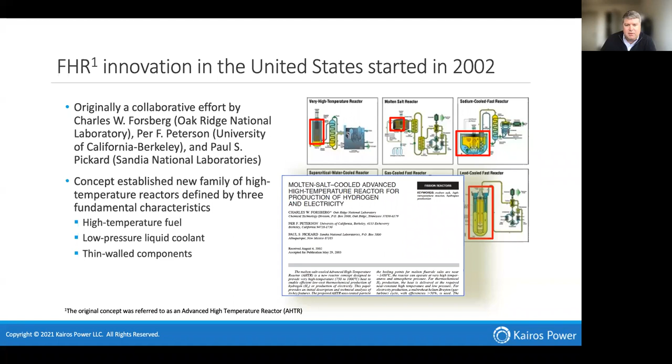This was a paper that was pretty much what kickstarted a lot of the US development around FHRs. At the time, they were called AHTRs. Really, it's a combination of these different technologies. So the root of FHRs started in the early 2000s, originally through Oak Ridge, but then really pushed through a number of different university and subsequent Oak Ridge programs funded by DOE.

Like many things, there's a lot of research being done both at the national labs and at the universities. This is a bit of a historical walkthrough of the origins of FHR, starting from that early 2000 time period. There was a lot of work to reinvigorate flibe work, and a lot of that was actually done at the University of Wisconsin-Madison. They had a lot of experience working with flibe predominantly through the fusion program, and this reinterest in looking at fluoride salt coolants for different types of fission applications was really kickstarted at UW.

There was a lot of work done through the universities. Some of this was funded through the Department of Energy IRP programs. So the initial IRP that started to look into this technology was a combination of MIT, Berkeley, and Madison in terms of developing some of the early concepts. There was some interest from the Chinese Academy of Science, where they were looking at a liquid fueled reactor, which has some overlap with some of the technology development needs for the FHR. And so there was a CRADA put in place between Oak Ridge and the Chinese Academy of Sciences, and there was a lot of active research going on.

Around the time of 2015, 2016, there was a recognition that a lot of this was active research. It was good research. It was pushing certain elements of the technology forward, at a lot of good universities and national labs. There's a big interest in doing paper reactor design or PowerPoint reactor design. So a lot of conceptual designs were being pushed both at the university level as well as through national labs. Around this 2015, 2016 time period, there was just a recognition that while this work was great, it wasn't going to lead to a commercialized technology.

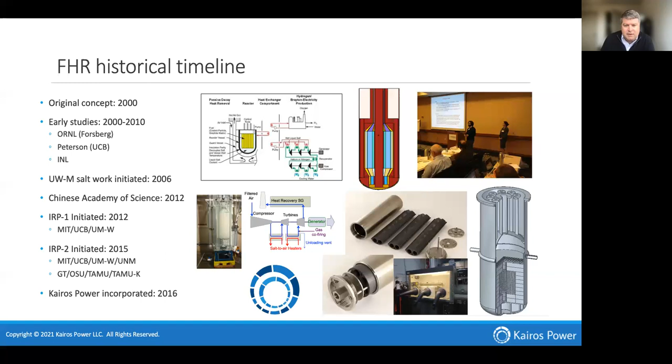In order for it to be successful, it would actually have to leave the university and national lab arena where it was predominantly being developed and pushed, and go into the private sector. That led to the inception of Kairos Power, which was incorporated in 2016, really at the end of the year. And I'll talk a little bit about the history of Kairos moving forward.

So we're a mission-driven company, as I mentioned, and we're singularly focused on the commercialization of one technology. We're not looking at lots of different types of applications of our technology. We're really focused on commercial deployment of the FHR. And we believe very strongly that there are opportunities in the United States for deployment. As I mentioned, we were founded in 2016.

We have about 210 employees across different sites, and I'll talk about those sites shortly. We're heavily engineering focused, so about 90% of our staff is engineering, and I think that number still holds true where we currently stand. We have private funding committed to our engineering design and licensing programs, as well as physical demonstration through both our nuclear and our non-nuclear technology development program.

We believe, like a number of our competitors, for us to be competitive, we have to focus on natural gas, not on nuclear that is unfortunately going out and being decommissioned. And so we believe very strongly that we have to be competitive with all sources of generation that utilities are considering across the United States.

In terms of locations, our headquarters is located in Alameda. We acquired an old naval hangar out on Alameda base, the naval base. If you're familiar with the Mythbusters show, it's a site where a lot of funny things happen. It's a neat space, and we moved in there in about 2017. We also have a location in Albuquerque, New Mexico, which we call KP Southwest. It's where we house what we call our engineering test unit, as well as our larger scale qualification testing.

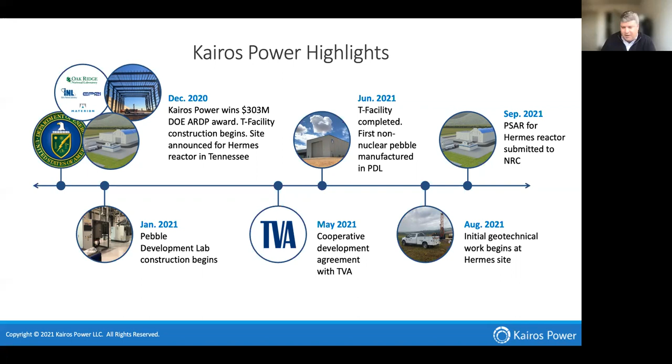And then last but not least, we're very pleased to announce that we submitted our PSAR for the Hermes reactor. It's a preliminary safety analysis report that was submitted just last month. So we've been very busy. Lots has been happening at Kairos, and these are just some of the highlights associated with it.

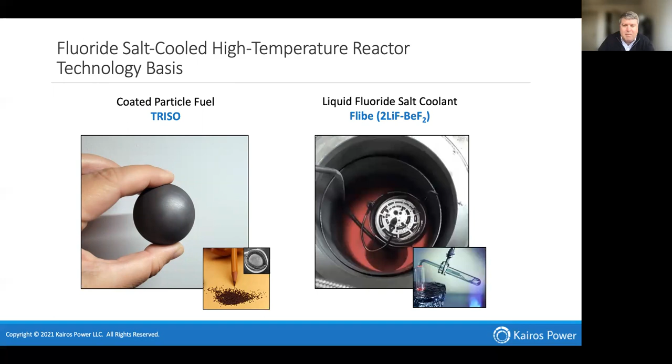So as I mentioned, really a combination of the high temperature gas reactor technology and the MSR technology. This is a Kairos Pebble on the left-hand side. For many people who may be more familiar with the gas reactor program and Pebble fuel historically, think of Kairos as being golf balls, and think about sort of HTGR and PBMR Pebble sizes as billiard balls.

So we're smaller diameter. On the lower left is tristructural-isotropic particles. That's actually a pressed pebble that Kairos has made on the left-hand side. And then we also utilize a high temperature fluoride salt coolant, Flibe.

If you can see, I think on the lower right is sort of the historical picture of Flibe that you see when you bring it up on Wikipedia. And this is just a picture of our first Flibe melt in our Salt Lab, showing the Flibe. It's a transparent coolant, an excellent coolant for us to be able to work with. And there's a number of reasons why we've down-selected to Flibe, and I'll talk a little bit about some of those shortly.

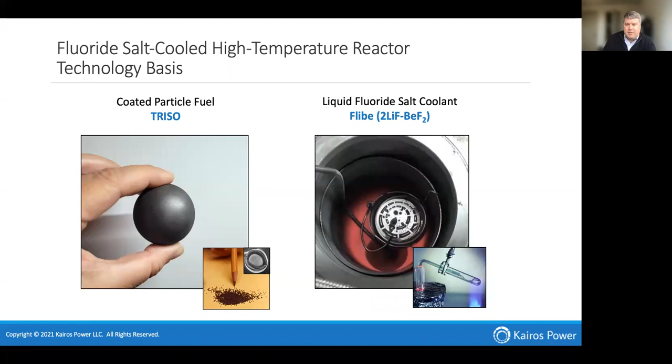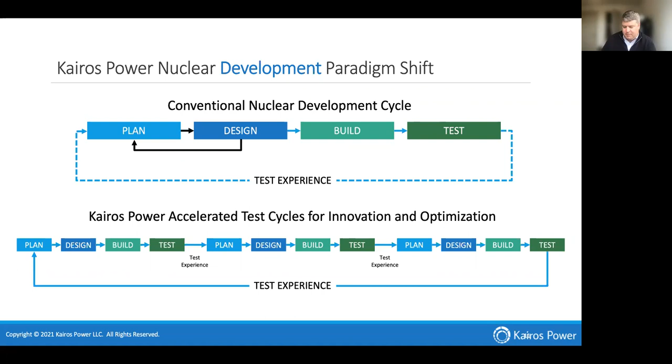This is key to everything that we do. It's key to our development, key to our licensing strategy, key to our commercial engagement. Breaking down problems that notoriously have very long time cycles into shorter time cycles is key to what we believe will be our commercial success strategy.

In order to do this, you have to have the capabilities and know-how to implement small loops quickly. So, as I mentioned, we have our Rapid Lab and our Salt Lab located at our headquarters in Alameda. We stood up our component testing facility in Albuquerque, where we're able to work with metric tonnage scale of FLIBE. And last but not least, we have what we're calling our U facility.

The U facility, I'll talk about a little later. This is a full-scale prototype of the commercial plant—not of what Hermes is, but the actual commercial plant and its nuclear island. It doesn't exist yet. We have some sites we're considering for it, but right now the focus is really on the upper three facilities I mentioned earlier.

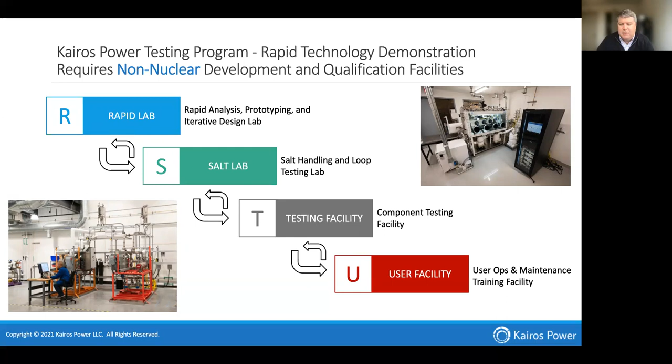But we believe this will be important for commercial users to get acquainted with the technology—how to operate the physical hardware, how to do remote inspections, how to do replacements, all the practical things that go into running a nuclear power plant. We believe the user facility, in addition to simulator work and other virtual tools, can be utilized to give a customer the confidence to operate the technology.

So as I mentioned, we're big on iterative development. We believe hardware is worth 1,000 calculations, so we're very focused on delivering hardware. On the lower right, it shows some of these loops that I was mentioning earlier. I'll talk a bit more about them in detail.

If you look at the lower right picture, we started off with a very small integrated demonstration—a water-based test—which leads into what we're calling our engineering test unit. This is actually a pretty substantial non-nuclear mechanical demonstration of our Hermes plant, of similar comparable scale. It has about 12.5 metric tons of FLIBE, making it the largest FLIBE test ever done. This is currently an activity going on in Albuquerque, and I'll show some pictures in a second.

The next iteration goes from a non-nuclear iteration to what we call our Hermes reactor, which will be in East Tennessee. Then it goes into another non-nuclear demonstration, our U facility, all the way out to what we call our KPX, or commercial plant. So it's both iterating at scale and iterating between non-nuclear and nuclear. We believe we're able to move faster in a non-nuclear environment to do major de-risking with these high temperature salt systems, and we want to leverage the ability to move quickly where possible.

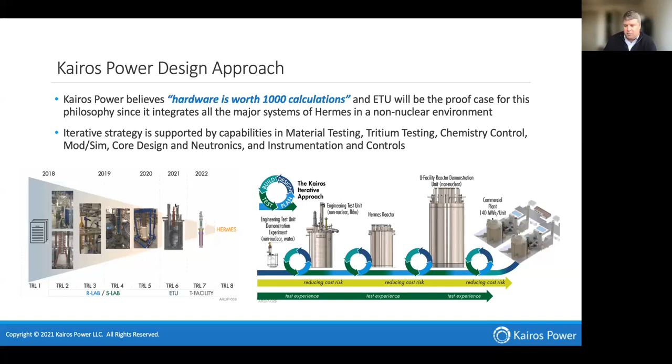So I'm going to talk a little about what we call little loops. As I mentioned, those four big steps I talked about earlier are what we might call large loops. But in order to get to the large loops, you actually have to do iterative smaller loops. I'll walk through a couple quick examples of how we in practice implement this iterative development, both in Alameda and in Albuquerque. So primary salt pumps is a good example.

The technology is not off the shelf. It's not readily available for FLIBE applications. There's been a lot of work, and a partnership actually with Barber-Nichols, to be able to develop this pump. But there were a lot of key questions along the way. And so, while we're very hardware focused, I want to assure you that we are...

Fervent believers in the value of modeling and simulation where it makes sense. Some of the loops I'm going to talk about are kind of in the context of where doing test demonstrations have been able to help either complement or even replace simulation work where needed. And so...

There was a lot of design work that went into what we call our primary salt pump, our PSP, and a lot of predictions about both pump curve and vibration. How do you manage thermal management? So how do you go from a 650-degree salt environment all the way up to 110 degrees, for example, in containment, to be able to manage those thermal gradients? And so we have to have the appropriate ability to manage that thermal gradient, and that becomes a real engineering challenge.

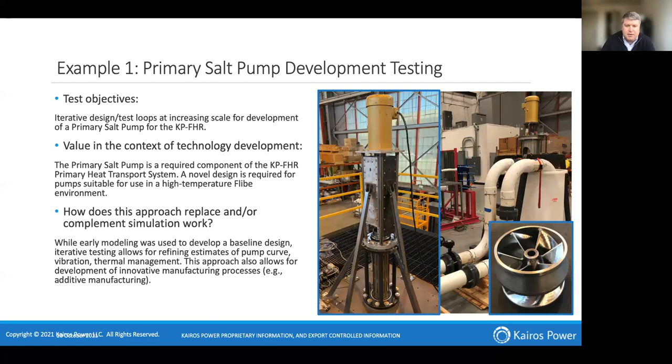So the impeller on the lower right, that's an additively manufactured impeller. We'll be utilizing that impeller in our engineering test unit. There was a lot of work done looking at the quality around the build, ensuring that the integrity of the build was appropriate for the application. But this is an example where we're able to incorporate different elements of both manufacturing and testing to be able to improve and optimize the design before it ultimately gets demonstrated in the engineering test unit.

In addition, control element drives. This is a unique technology. It's a technology, again, that's not off the shelf. No one has ever built an FHR. And so there are challenges about taking what might work for an SFR or what might work for an HTGR and what really needs to be done for this type of environment.

And so there were some key questions, similar challenges, because these are all components that sit on the upper head of the reactor vessel, where elements of conventional drive mechanisms really didn't apply to our environment. And so we've done a number of development tests, really testing out some of these mechanisms, ensuring that their fit and function perform well in this high temperature salt environment.

We've also been able to look into opportunities around more conventional manufacturing to be able to improve the design for manufacturability of these different components and then demonstrate them. And so in all of these different applications I'm walking through, there was a baseline simulation effort to kind of inform the performance of these types of components. But it's really bringing it into the lab, developing the hardware, and demonstrating that it ultimately works that gives us that greater confidence.

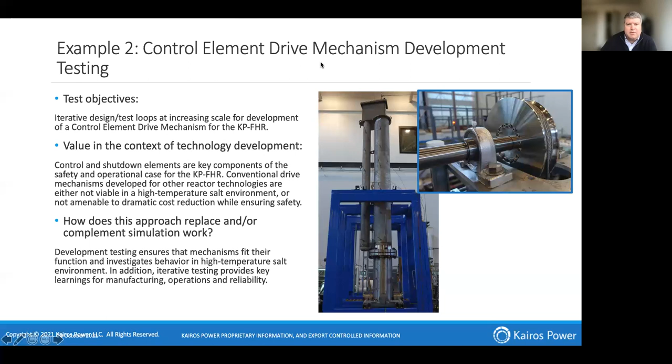Not everything we do is just around development. We also have validation testing needs. And so one of the key questions in the downcomer region for our vessel, it's a high impact phenomena for our reactor safety case, especially as we're looking at in-vessel natural circulation, if we're looking at a range of different transients such as loss of forced cooling transients. One of the unique features of the salts at 650 degrees C, there was a lot of work historically done...

Showing that you can actually use simulant fluids to preserve some of the key non-dimensional parameters. Ones that are important here are around mixed convection, but the ability to use lower temperature surrogates to get high quality validation data is really unique. The ability to get high quality validation data in a salt environment, just like the ability to get high quality validation data in an LWR environment, is really challenging. And the ability to preserve similitude for a single phase coolant and the ability to get good quality validation data allows us to build confidence in our tools.

And so we were able to do this test. It's actually extremely tall, I'm not sure the picture does it justice. It's about 12 to 15 feet tall.

Shows some nice tests we've done using Dowtherm to validate CFD simulations of the downcomer region. One of our strategies around IET and SET is the ability to leverage these simulants to build up a predictive accuracy capability with our evaluation models used for licensing. This is key, central to our development, and a really important aspect of our safety case.

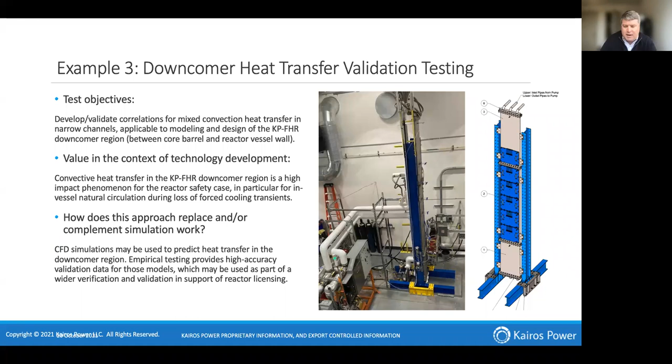It's here in Alameda, and it's a nice test that gives us the ability to look into some of the key performance features of our engineering test unit. We're able to look at both some of the mechanical features as well as fill and drain operations. It's a practical tool for operators, for ETU, to get some runtime with the physical demonstration.

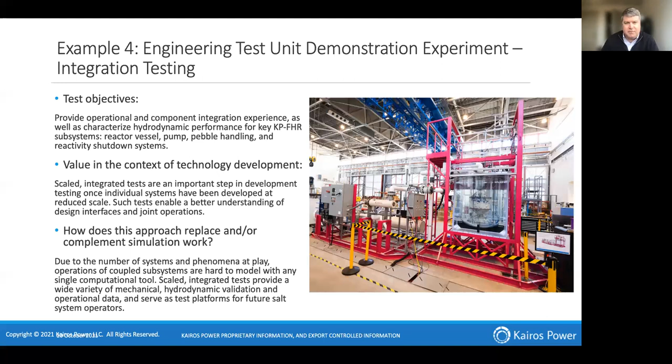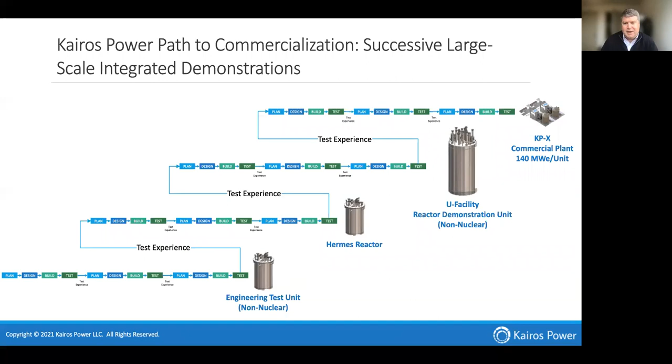These little loops lead to big loop integrated demonstrations. This is just a re-showing of those loops, showing the engineering test unit going to the Hermes reactor and our U facility, ultimately leading to the KPX. This shows this progression in a little bit more of a coherent snake chart: non-nuclear to nuclear to non-nuclear to nuclear.

Switching gears here, talking about larger scale demonstrations. This is the engineering test unit as compared to our first commercial unit, the KPX. What is our engineering test unit? It's non-nuclear, unenriched, flibe-wetted, and isothermal. It effectively uses all of the same mechanical features that you'd see in our Hermes technology, but it's obviously non-nuclear. So it's a full-scale version of Hermes, and it's proportional to the KPX demonstration.

Why? We're very interested in ensuring competitive cost through vertical integration. This is a very important aspect of the Kairos development. We also want to flex our supply chain early in the development, and that's really key. In addition, it allows us to demonstrate our design and test elements of our program, and the ability to iterate more quickly through these developments. The ETU is really a culmination of a number of those smaller, earlier loops, and it also allows us to accelerate the base of our large-scale FLIBE operations.

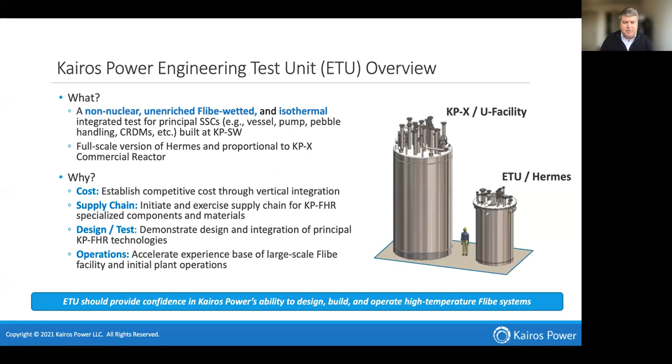As I mentioned, this is 12.5 metric tons of FLIBE, and this is the first time anyone has done a test of this scale. So it allows us to build that operational case and that ability.

Just some pictures for scale. This is actually half of the ETU vessel, a slightly older picture showing the vessel on its side. The support plate or support structure is in the lower right, but this is about half the height. ETU is the exact same technology as Hermes, but for scale, it gives you an idea of what the Hermes vessel would look like. That's half the size of the vessel since it's on its side, and they're actually welding the upper part of the shell here shortly.

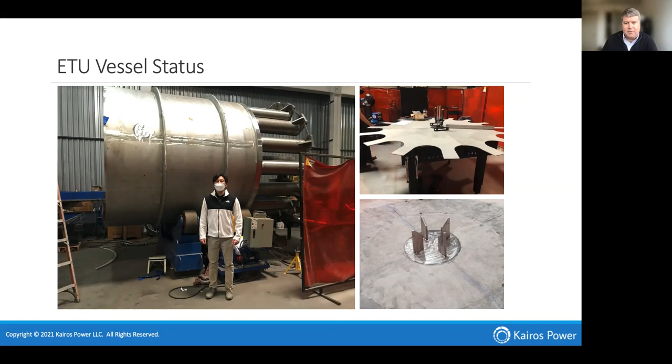We believe strongly in standing up manufacturing capabilities where existing suppliers do not exist. So we've invested a fair amount of time and effort into graphite block manufacturing at KP Southwest. These are some non-proprietary pictures of both the capability as well as some of the blocks, and where they start before they actually go into becoming part of the reflector structure within the ETU.

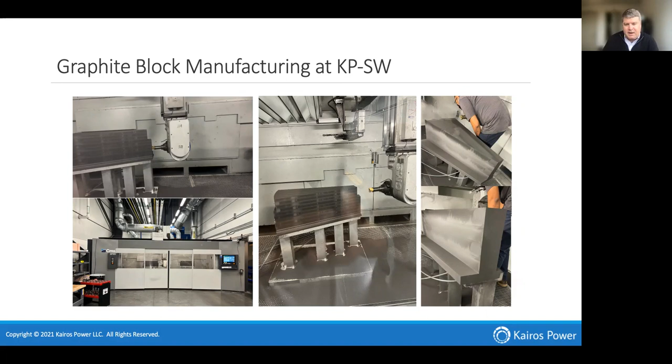Let's see if this video works. It shows, for those who have seen graphite machining before, it's a very messy process. If you look at the picture in the lower left, a lot of the HVAC supply you see on the upper part of the mill is really a dust collector system that's capable of removing dust in situ while you're doing the machining. This is a unique capability Kairos is investing in, and it's really part of our DNA in terms of bringing manufacturing in-house.

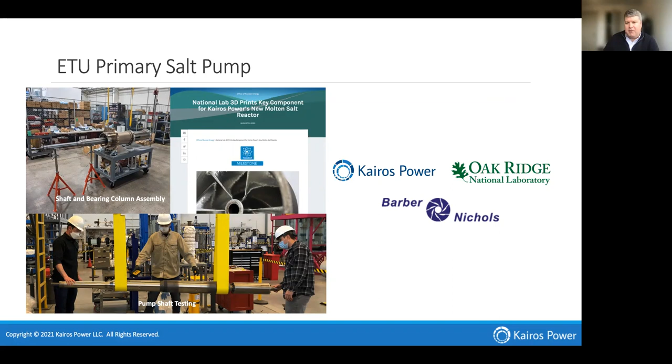Just some more snapshots showing the primary salt pump. This shows the shaft and bearing column assembly, as well as some of the pump shaft tests that were being done. Our partners, we worked extensively with both Oak Ridge and Barber-Nichols.

Here's some other pictures of the primary heat transport system, showing some of the piping systems. These are 8-inch diameter stainless steel pipes, quite large pipe, by which the fluoride salt flibe is circulating through for the engineering test unit.

Our piping system is designed to meet B31.3, so we've got skilled welders here on site doing a fair amount of the welding to assemble the PHTS. The final assembly is shown in the lower middle picture, showing the PHTS system in pieces and parts. At the top of that bottom middle picture, you see where the vessel is to be housed, showing approximately what the geometry of that piping looks like when laid out.

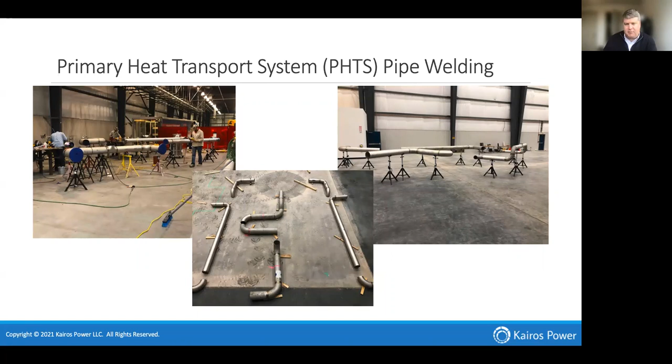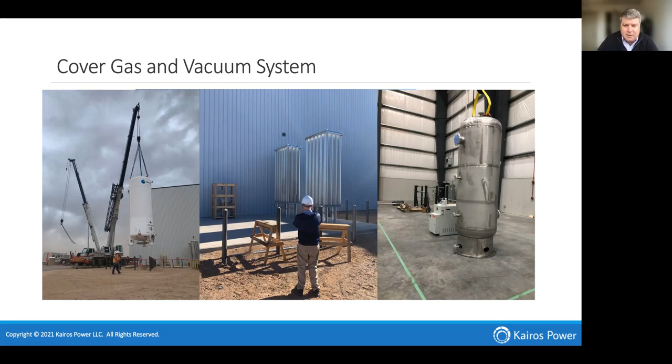One of the neat things, and I'll talk a bit later about this, is we found great success in hiring recent grads. You need a combination of experience as well as a lot of enthusiastic, mechanically inclined recent grads, and there's a ton of opportunities. A lot of the activities I just showed, a number of them were led by or driven by recent grads, being put into a high-paced environment to take ideation, simple ideas starting with early development, and really run them through the paces to get into larger scale demonstrations. So we have a fair amount of experience on staff, but also a large number of recent grads, including a number who come to us from the University of Tennessee.

It's important that we maintain a quality EH&S program. Working with FLIBE is serious business. Working with the beryllium bearing salt presents its own unique hazards and challenges. We've done a great job so far working with FLIBE. We're limited in the quantities we can work with here in Alameda, and we're going to a larger scale at the engineering test unit, where we're working at metric ton scale, so our EH&S program has to scale appropriately.

Our EH&S program is a big part of what we're doing right now. It's how we ensure we can work responsibly with salt, and we're very excited about the record we have. We've spent a lot of time partnering with the Materion company, located in Ohio, as part of our strategic partnership. They've been central in translating strong lessons learned from their operations working with both beryllium fluoride and beryllium in general, and they've been an excellent partner.

And so these are just some examples of the type of PPE and some of the training activities that we do out here in Alameda.

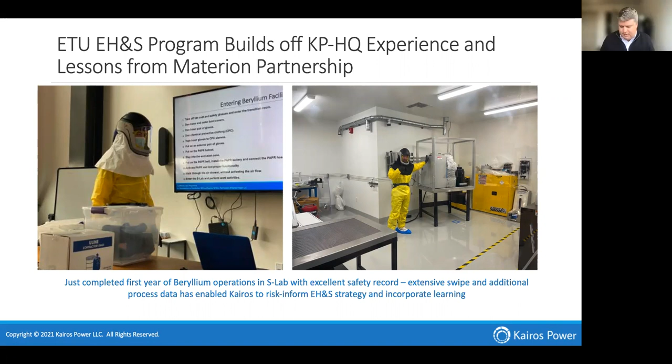And I believe last but not least, this just shows the control room, as well as our operations support room in Alameda. We've spent a lot of time incorporating lessons learned from historical operations, both from the nuclear side and from our site director at KP Southwest, who comes to us from SpaceX with a lot of experience in control rooms for shuttle launches as well as space launch. So that combination of non-nuclear and nuclear operational background, bringing that into a new environment operating a large-scale FLIBE system, we believe has given us a great opportunity to bring a lot of best practices from different industries as well as what is needed for a non-power test reactor.

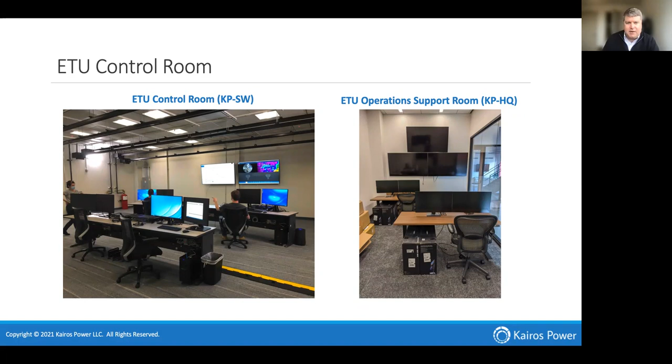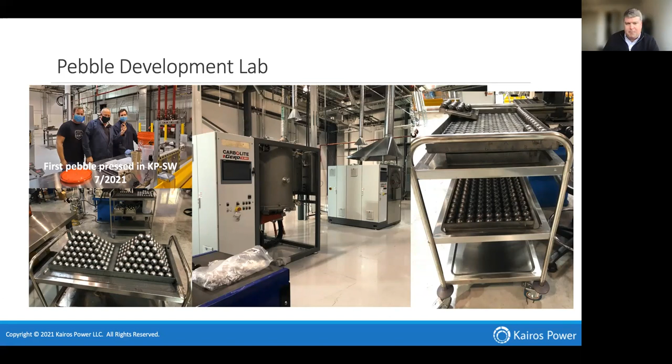Last but not least, this is a picture of our Pebble development lab. We need 30 to 35,000 pebbles for the engineering test unit. We are pressing all of those pebbles at KP Southwest in our Albuquerque site. We pressed our first pebble in July, and we're about 15% of the way through, moving very quickly through pebble pressing. This just shows a couple pictures of those formed pebbles.

I'm going to transition here, actually do a little bit of a time check. It seems like I've got about 5 minutes left, and then we can hopefully open it up to a broader discussion. The Hermes low power demonstration reactor.

What is the low power demonstration reactor? Well, it's a reactor that we hope will prove Kairos's ability to deliver low cost nuclear heat. Some of the overarching objectives of Hermes actually build off of the engineering test unit. So we want to be able to establish a competitive cost, and we have a very aggressive overnight capital cost target for Hermes.

We believe that's important. Our supply chain, we believe it's critical. So our supply chain for engineering test unit is predominantly focused on non-nuclear today. Hermes is obviously a nuclear facility, a nuclear reactor, and it's going to have those types of specialized components. So this is a key part of why we're standing up Hermes, again to extend that design test paradigm, to be able to bring it to a nuclear demonstration, as well as the licensing approach.

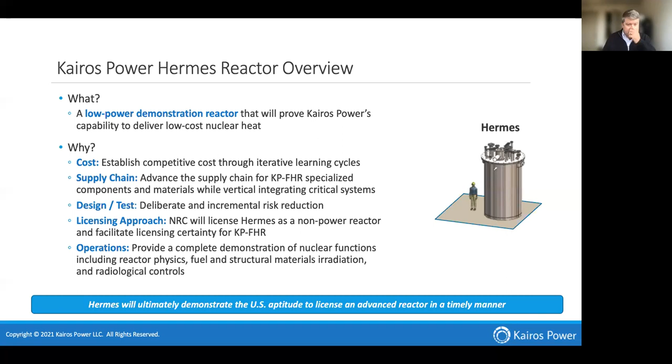It's important to get early buy-in from the NRC in terms of some of the pre-application work we've done, and we believe Hermes is now an opportunity to go through the Part 50 process to actually provide licensing certainty for the KPFHR. So we're licensing this as a non-power reactor pursuant to a NUREG-1537 type approach. However, it gives us early engagement with the regulator that we believe will translate later on to the commercial demonstration. And then last but not least, similar to ETU, it provides a very strong operational basis, but really from a nuclear operations side, if that makes sense.

Moving along, we're very happy to be recipients of an ARDP award. It's a cost share partnership between DOE and industry. The total award value over the next 7 years is about $629 million. We're very glad to partner with both DOE as well as a number of labs, in the form of Oak Ridge National Lab and INL, EPRI, as well as our strategic partnership with Materion. We believe it's essential to work with these entities to be able to deploy Hermes.

As I mentioned, our licensing strategy is absolutely essential. We believe very strongly that in order to achieve cost certainty for our commercial technology, it's got to be a combination of technology certainty - will it work? Licensing certainty - can it be licensed? Supply chain certainty - is there an existing supply chain? And last but not least, construction certainty.

So we've been heavily engaged in a number of licensing engagements. We've submitted a number of topical reports in key areas, ranging from our quality assurance program to strategies around how we design and build our integral effects testing, out to salt chemistry and beyond. And so, as I mentioned, we're very excited to have submitted our PSAR, which was submitted in September of 2021, so last month. This was a huge accomplishment for the team, and our licensing team did an excellent job in terms of getting that deliverable through the finish line and getting it submitted.

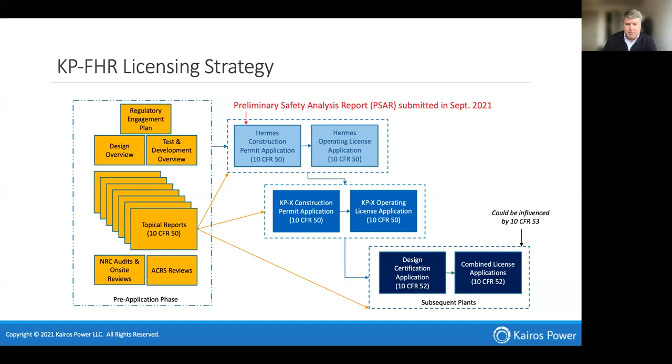We know there's a lot of work that goes into supporting follow-on questions around the PSAR, as well as what's going to be needed to submit our final safety analysis report, which will ultimately be needed for the Hermes reactor.

And then just a little bit here on the real estate deal. We've acquired the former K33 gaseous diffusion plant site, not too far away from UT Knoxville. Hermes will achieve criticality in 2026. This is obviously out in Oak Ridge.

And we're just excited about the ability to come to Tennessee. We've had a great experience in New Mexico, working in Albuquerque and working with the local community. And we've had just an excellent experience so far working with a number of different leaders in the nearby Oak Ridge as well as Knoxville region. And we're just excited to come to Tennessee.

We made a commitment in terms of our total capital investment as well as job creation. I'll just note that we've exceeded that number for what we committed to New Mexico, so I think we have a good track record in terms of performance. And we're just really excited to come out and start the Hermes project. I think that's one of my last slides.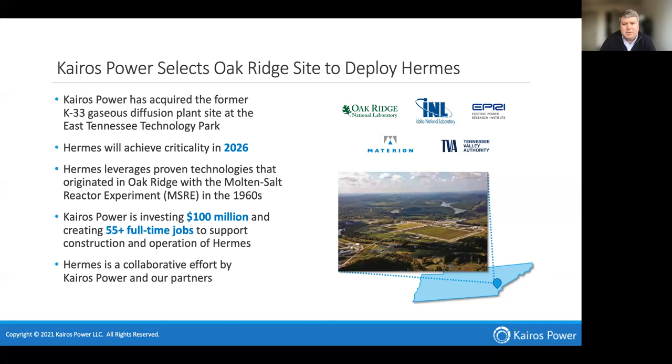We believe very strongly that for Kairos to be successful, we need to be able to hire recent grads. That means undergrads, that means grad students, that means postdocs even. And we've even had professors come take sabbaticals and get some great mutually synergistic experiences working at a place like Kairos. So we're very interested.

If you're interested, we've got a number of folks that have come from UTK. I think a few of them may be on the line. Our director of licensing comes from the University of Tennessee. We have engineers both in modeling and simulation and safety analysis. And as I mentioned, our physical footprint right now in Tennessee is relatively small as we're starting to get some of the site characterization work out of the way.

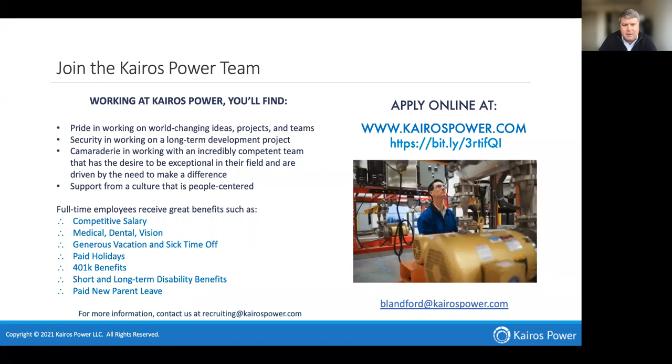This is a video that shows one of our tests, but I think I'll go ahead and end there. So Wes, I'll hand it back over to you.

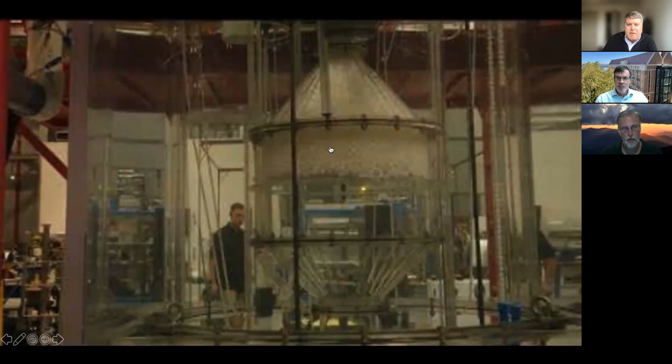That's a great question. So, I'll try to get myself to not get into trouble here. There are code requirements for your material down selection, and so that drives some of your upfront decision making.

The reality is we believe strongly that 316H, which is the structural material of choice for Kairos beyond our ceramic materials, is key and central to our safety case. Having said that, if you look at the history of nuclear materials in general, the industry has always innovated. My background in the LWR space was around steam generators. When the second Inconel 600 mill-annealed tubing came out, they discovered there were challenges, degradation issues around stress corrosion cracking. We moved to more mature Inconel 690, and there's always this ability to innovate and ensure that we're evolving.

And that's also a partnership that you do with chemistry, right? So it's not just solely a materials decision. It's also one that, in the case of light water reactors, you're worried about water chemistry. For us, salt chemistry is an important partner in the evolution of material degradation. So it's difficult. We want to move quickly. We want to iterate fast, but at the end of the day, you have to pick a material down selection. You've got to ensure you've got the appropriate supply chain, and you have to build your technology to ensure that it can go into service.

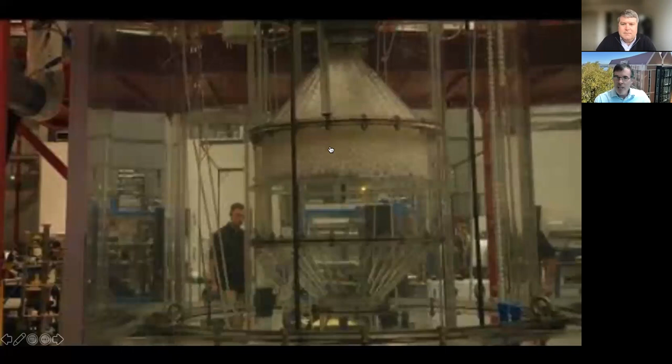So we'll hop back up to the top where Dr. Worth had a question about the licensing of Hermes. Is that licensed by NRC, and really what's their perspective on the fuel in Hermes?

Sure. So yes, it's licensed by the NRC. I'm not going to speak on what their perspective on the fuel is with respect to Kairos. That's their perspective. We have submitted a number of topical reports around fuel performance and fuel qualification. To my knowledge, some of the SERs have actually been released for those topical reports. So I believe that we are making good headway in our engagement with the staff, but I would let them provide their perspective on our fuel as opposed to me opining, if that makes sense.

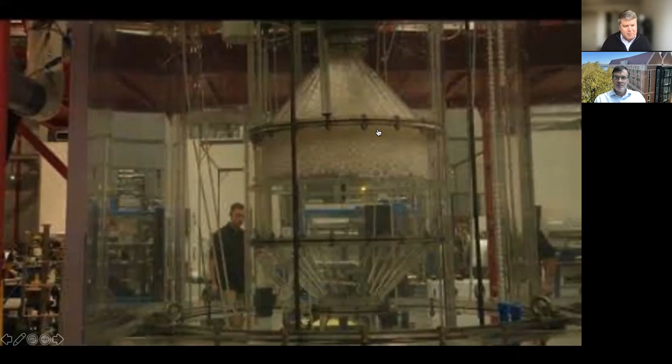But my understanding and belief is the proliferation resistance around fuel really starts with both administrative and engineering control—having a healthy MC&A program, ensuring that you're tracking and monitoring your fuel. There are a lot of synergies between the safeguardability of fuel and the safety and security of that fuel, so you want to keep track of your fuel for a variety of reasons. Safeguards is just one of those elements. We're committed to standing up a healthy MC&A program in the event of a theft or diversion, which is obviously very low probability in our minds.

There are challenges in reprocessing TRISO fuel that are unique to TRISO vis-a-vis LWR fuel. Like anything, I think this is possible, and then you start going down a long litany of questions around state actors and what are the capabilities to go off and do that. I won't get into that—that's not my area of expertise—but I think inherently there are increased features associated with the fuel that make it more safeguardable, or less of a concern from a proliferation resistance standpoint. But there's a lot of complexity surrounding that question, if that makes sense.

Okay, I've just heard people say that TRISO fuel, proliferation-wise, would present much less risk. I just wanted to hear your thoughts.

That is correct. But like anything, if you put enough time, energy, and money in engineering—but absolutely, TRISO is a lower proliferation risk, I would say, than LWR. And I think they're always looking at how easily could you disguise it. Maybe the reprocessing, the transformation that would have to occur for TRISO would be much more difficult to disguise, whether it's energy usage or space necessary, than maybe our current fuel forms.